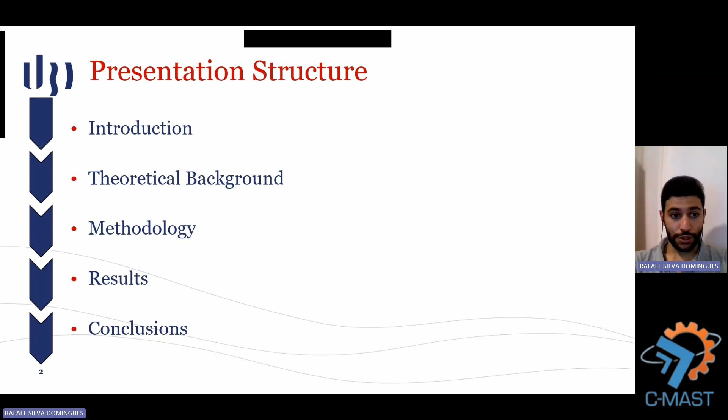In the last decades, the aviation sector has grown and reinforced its importance at an international level. According to a report found in the literature, in 2015 international aviation used approximately 160 megatons of fuel. According to some experts, when compared with 2015, by 2045 international air traffic is expected to increase by 3.3 times, and fuel consumption is projected to increase by 2.2 to 3.1 times, depending on advances in technology and the air traffic management scenario.

This creates a problem because the increased fuel consumption will inevitably lead to an increase in pollutant emissions into the atmosphere. The combustion of fossil fuels produces emissions which are usually considered the main responsible for greenhouse gas emissions. For the aeronautical sector, the emissions of major concern for climate change are usually NOx, CO, CO2, and particulate matter.

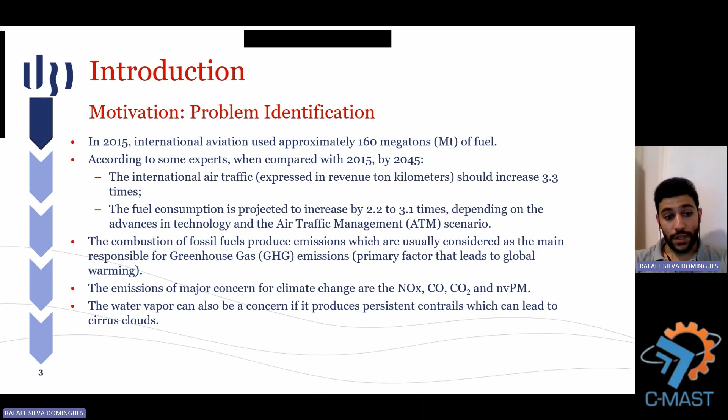Sometimes water vapor can also be a concern if it produces persistent contrails, which can lead to cirrus clouds. However, during this research, water vapor will not be considered as a major pollutant.

For possible solutions, if we don't consider economic and political measures and focus only on the technical part to mitigate the emissions problem in the aviation sector, the several possible solutions can usually be grouped into 2 main options. The first is reduction of fuel consumption by upgrading technology used in current aircrafts, with the objective of achieving higher efficiencies. The second is the use of alternative fuels and power sources.

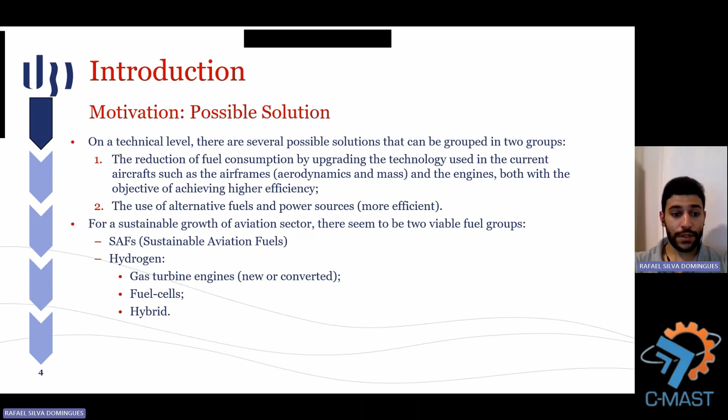According to some reports, this last option seems to be the most effective. Therefore, considering the fuels currently known, for a sustainable growth of the aviation sector, there seem to be 2 viable fuel groups: sustainable aviation fuels, and hydrogen, which can be used in combustion on gas turbine engines, either new engines or converted engines, and can also be used in fuel cells. A third solution is the use of a mix of the previous 2 options, which consists in hybrid systems.

So the object of this work consists in the conversion of current gas turbine engines to new sustainable fuels, mainly hydrogen, which is the main objective of this research.

The main objective of this work consists in the study of the feasibility of the use of gaseous hydrogen as a substitute of conventional jet fuel in a CFM56-3 combustor using a CFD approach. For that, it was necessary to analyze and compare the results obtained for hydrogen and jet fuel during the CFD analysis. This was made through the comparison of NOx emissions produced by jet fuel and hydrogen for the power settings represented by the ICAO's LTO cycle for the standard operating conditions of the engine.

The last objective was to analyze and compare the influence of several operating parameters on the emissions of NOx with the use of hydrogen as a fuel.

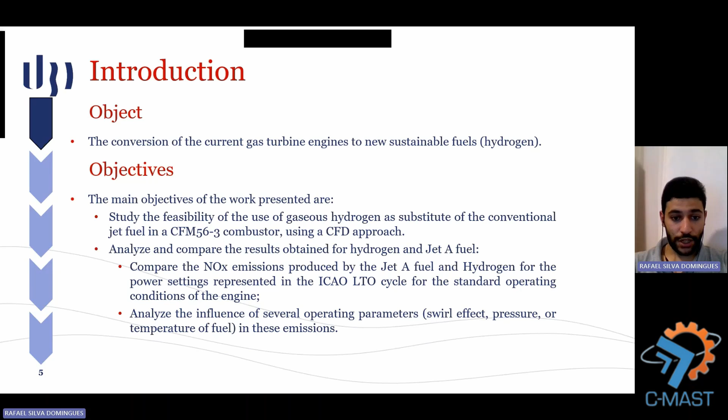Hydrogen is the simplest and most abundant of the chemical elements in the universe. On Earth, under standard conditions, it exists as a diatomic gas, but its concentration is negligible. However, in chemically combined forms, it is the 3rd most abundant element on the planet.

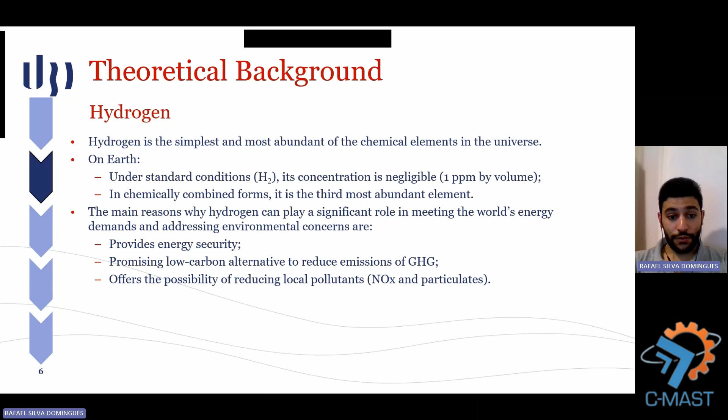The main reasons why hydrogen can play a significant role in meeting the world's energy demands and addressing environmental concerns are that hydrogen meets 3 extremely important criteria. First, it provides energy security. Then, it's a promising low-carbon alternative to reduce the emissions of greenhouse gases. And third, it offers the possibility of reducing local pollutants, mainly NOx and particulate matter.

For the conversion of the current gas turbine engines to hydrogen, in theory, to adapt the current gas turbine engines to efficiently use the hydrogen as a fuel, the minimum modifications required consist first in the replacement of the injection system, and second, the implementation of facilities to evaporate the hydrogen, which is usually stored in tanks in a liquid or cryogenic state.

However, if we want to take full advantage of hydrogen's properties, the combustion chamber must also be changed. In both cases, when changing to hydrogen, either the combustor outlet temperature (COT) or the net thrust of the engine can be retained. Usually, when the COT is preserved, the net thrust increases, and when the net thrust is retained, the COT decreases.

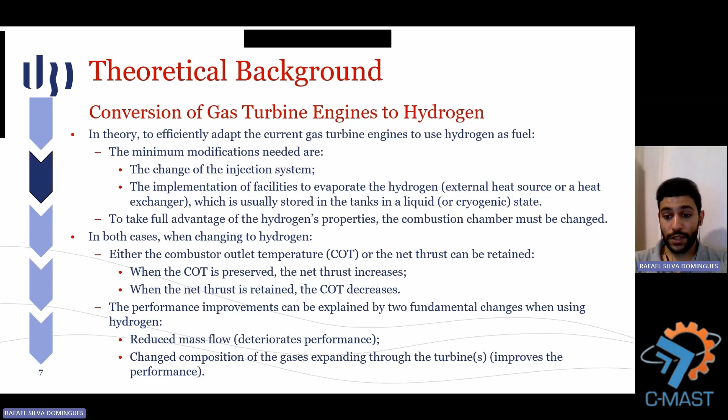According to some works in the literature, these performance improvements can be explained by two fundamental changes when using hydrogen. First, there is a reduced mass flow through the engine, which in theory deteriorates performance. Second, there is a changed composition in the gases expanding through the turbine, which usually improves performance. When combining these two effects, the effect of the latter on engine performance is always more relevant than the former, hence the improvement in performance.

Regarding the mechanisms of pollutant formation for conventional fuels, as we know, the pollutant emissions of most concern are usually CO, CO2, unburned hydrocarbons, NOx, and particulate matter. From an environmental point of view, hydrogen can be considered almost as a clean fuel that offers the possibility of reducing pollutant emissions, since its combustion only produces NOx emissions.

Considering this research and its objective, as NOx is the only common pollutant produced by these fuels, and considering the objectives of the work, only the NOx emissions were studied.

According to ICAO, these emissions can be evaluated in two possible scenarios: first, the NOx emissions in the full flight, or second, the emissions produced when completing the ICAO's LTO cycle. In this case, since we only have the experimental results for the ICAO's LTO cycle, this was the approach selected.

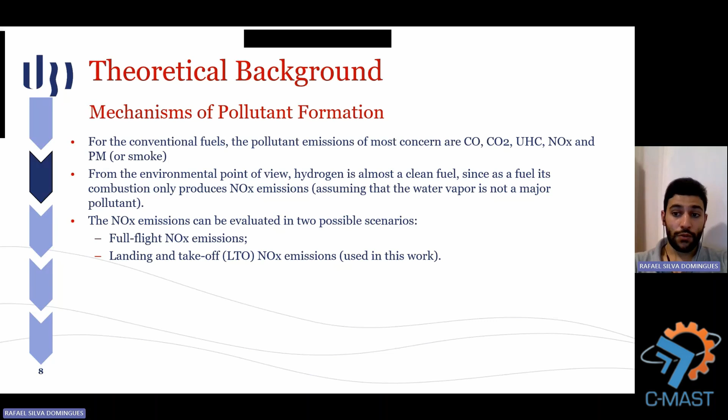The combustor model used for this study was from a CFM56-3, an engine developed and manufactured by CFM International. The version under study consisted of a high bypass axial flow turbofan with a bypass ratio of 5.1 to 1.

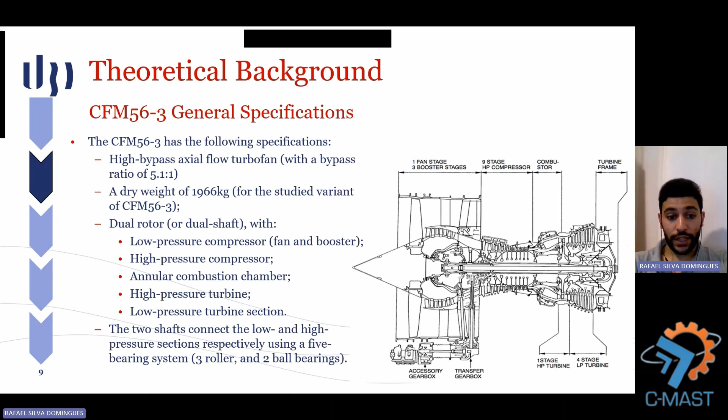This specific version has a dry weight of 1,966 kilograms. As we can see in this image, this engine has a dual rotor configuration with a low pressure compressor, high pressure compressor, annular combustion chamber, high pressure turbine, low pressure turbine, and the two shafts connecting the low and high pressure sections respectively using a 5-bearing system.

From here onwards, I will describe the methodology followed to achieve the objectives initially presented. However, to simplify the explanation of the process followed, this work was divided into 3 consecutive and iterative phases.

Phase number 1 consisted in the correction and preparation of the geometry for the next phases, and by the end of phase number 1, it was necessary to generate an independent mesh to use in the simulations. Phase number 2 covers the entire process of defining the simulation parameters in order to obtain the correct patterns for the flow and combustion within the chamber.

Phase number 2 also covers obtaining the final results for both fuels. This phase is deeply related to phase number 1, since part of the geometry corrections were due to problems detected in phase number 2 during the simulations.

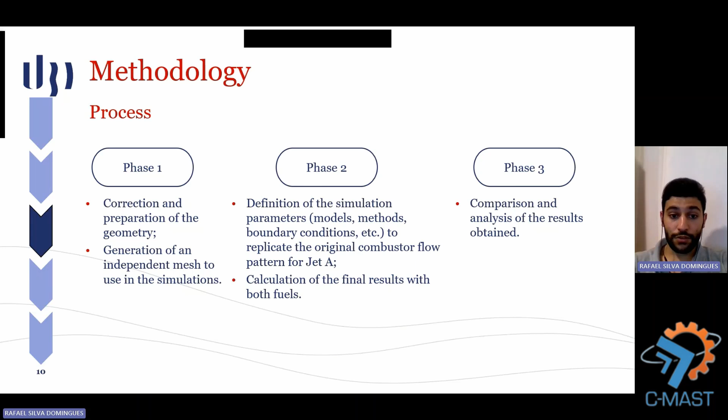Finally, phase number 3 consisted in the comparison and analysis of the results obtained during phase number 2. Due to the complexity of phase number 2, it was necessary to subdivide it into another 3 subphases.

The objective of phases 2.1 and 2.2 is to credibly replicate the original operating conditions of the engine working with Jet A through an iterative process. Phase 2.3 is associated with the hydrogen simulations, to evaluate the theoretical performance of the engine with this fuel.

In this case study, phase 2.1 was carried out only for the 100% power configuration, and it consisted of an iterative process in which the objective was to determine the air mass flow distribution in percentage, first to replicate the flow pattern inside the combustion chamber, and then to obtain an outlet average static temperature similar to the reference values we have from other works.

Phase 2.2 consisted in the verification of whether the air mass flow distribution calculated in phase 2.1 was the most appropriate for each power setting, through the analysis of the flow pattern inside the chamber and the NOx emissions, which we could compare with the reference values from ICAO.

The final objectives were to obtain first the final results for the control simulations with Jet A, mainly the NOx emissions, and then to find also the boundary conditions for the air inlets for each power setting.

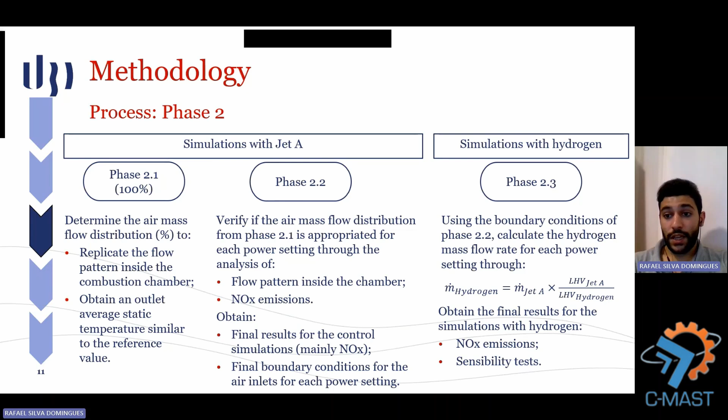After that, it was necessary to run the simulations, and the final objective was to obtain the results for the simulations with hydrogen, mainly the NOx emissions and the results for the sensibility tests performed.

About the NOx analysis, after analyzing some articles available in the literature about studies identical to this one, it was concluded that there were two ways of analyzing the NOx emissions: first, the utilization of sub-mechanisms provided in the detailed mechanisms, and then the use of the NOx model provided in Ansys Fluent.

In these studies, it was also mentioned that to simulate the combustion process inside the chamber, the use of the detailed mechanisms allowed better results than when using the probability density models available in Ansys Fluent.

After analyzing and testing a considerable number of mechanisms available in the literature, the mechanisms chosen for this research were, first, the mechanism presented by Kundu et al. to simulate the combustion of Jet A in phases 2.1 and 2.2, and then the mechanism of Li et al. to simulate the combustion of hydrogen in phase 2.3.

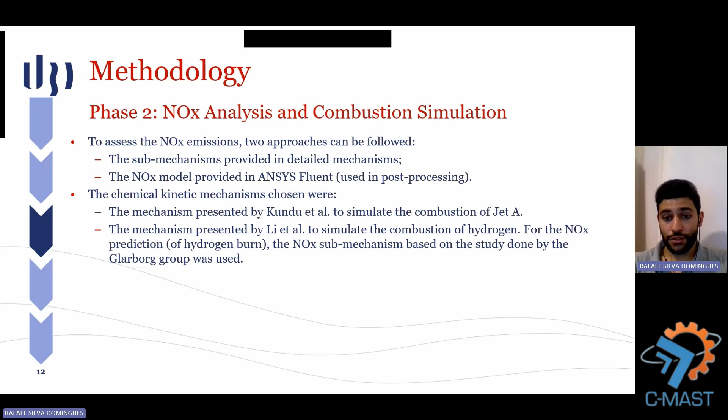Regarding the simulation setup, in general, the simulations carried out were 3D simulations in steady state, and the pressure-based solver was used in all of them.

After some tests with the available models in Fluent, it was found that the best results were obtained for the set of models defined as shown here on the left, as we can see.

However, due to the complexity of this work and the number of models applied, to obtain completely converged solutions, it was necessary to use a step-by-step approach in which simpler models were used to obtain the initial converged solutions, or close to it, as you can see here for the Jet A, and then for the hydrogen simulations.

We started here: step 1, step 2, 3, and 4, and finally the post-processing. Here we use the simpler models at the beginning, as we can see.

After getting the initial converged solutions, or close to it, the more complex models were gradually applied, as we can see here in these cases, step 2, 3 and 4, until we got the final results that we presented in the research.

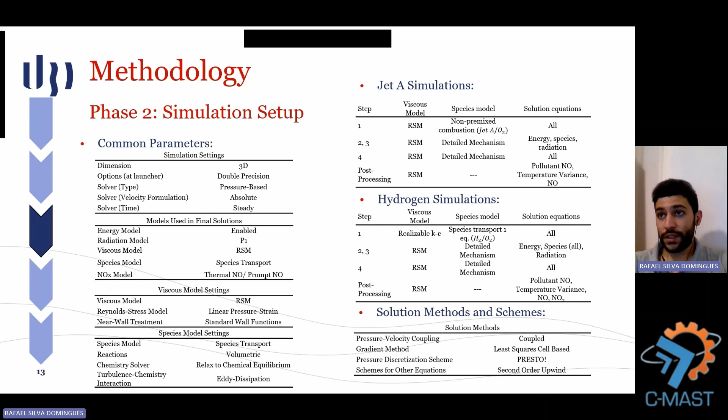Regarding the results, in this presentation only the results related to the NOx emissions from a quarter of the chamber will be presented, as they were the main objective of this work.

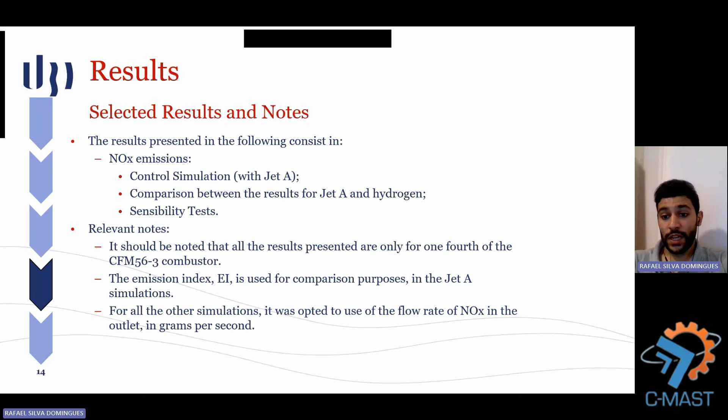Starting this analysis with the emissions obtained during the control simulations with Jet A, this figure presents the results of the control simulations and shows the emission index at the exit of a quarter of the combustion chamber for the Jet A.

Here we have ICAO's reference data and the two approaches followed during the simulations: the utilization of the NOx mechanism and the utilization of the NOx Ansys model.

Considering the two approaches used to predict the NOx emissions presented in this figure, it's possible to conclude that for both approaches, the NOx emissions are lower at lower power settings and attain maximum values at the highest power condition.

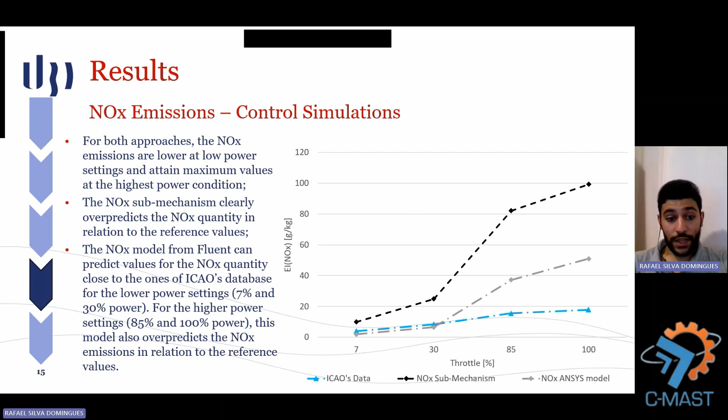The NOx sub-mechanism clearly overpredicts the NOx quantity in relation to the reference values. However, the NOx model from Fluent can predict values for the NOx quantity close to the ones from the ICAO's database for the lower power settings. For the higher power settings, this model also overpredicts the NOx emissions in relation to the reference values.

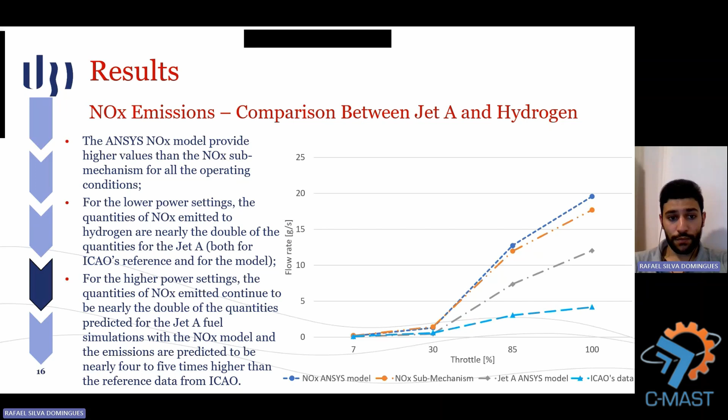In this work, several sensibility tests were carried out, namely the presence of the swirl effect at the swirler's inlets and the influence of injection parameters, namely the fuel injection pressure and the temperature of the fuel. Regarding tests associated with injection pressure, modifying these values did not cause any relevant changes in the results, and for this reason these results will not be presented, as they do not allow analysis of the influence of this parameter.

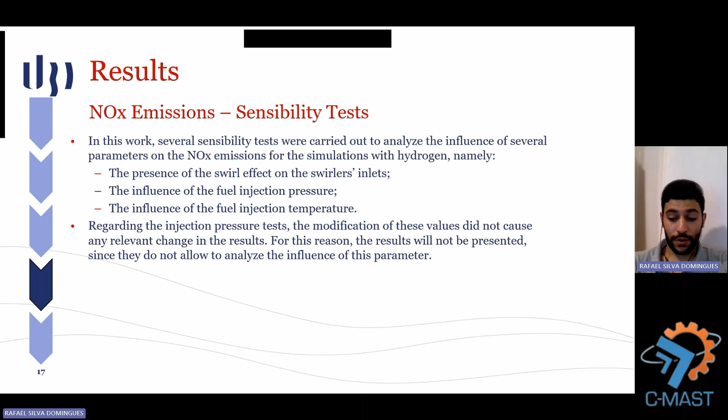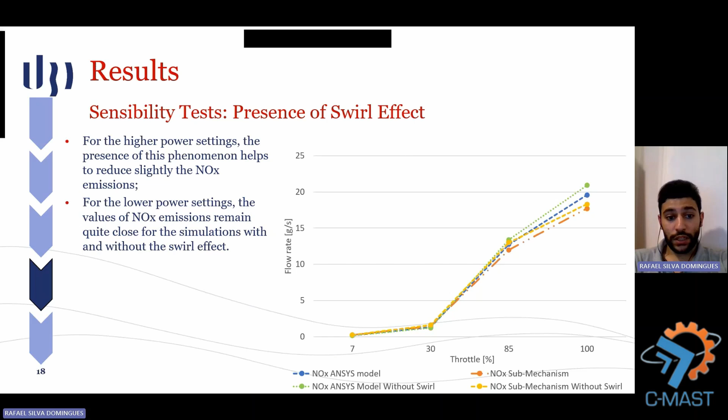Looking at this image, if we consider the same forecasting approach—either just the Ansys NOx model values or the sub-mechanism values—it is possible to conclude that for the higher power settings, the presence of this phenomenon helps to reduce slightly the NOx emissions. However, for the lower power settings, the values of NOx emissions remain quite close for the simulations with and without the swirl effect.

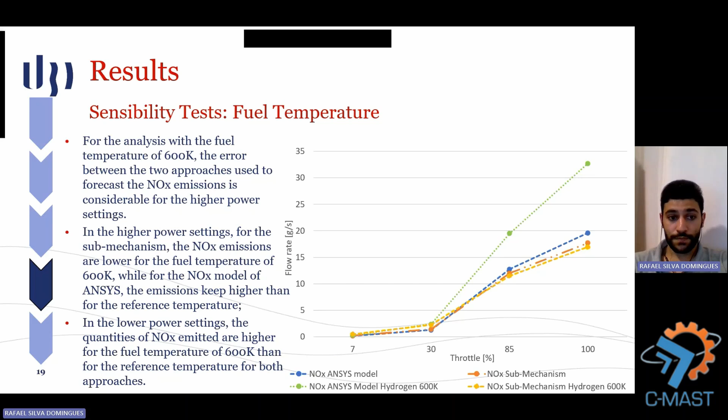The conclusions of this research consisted, first, in that all of the objectives were accomplished, and it was demonstrated that theoretically, the CFM56-3 can work with hydrogen as a fuel with minor changes. Then, the results obtained for the control simulations were acceptable when compared with those of ICAO.

The results obtained for the simulations with hydrogen demonstrated that with the increase of the accelerator percentage, a higher mass of NOx per mass of hydrogen is produced, due to the increase in the temperature inside the chamber, as would be expected.

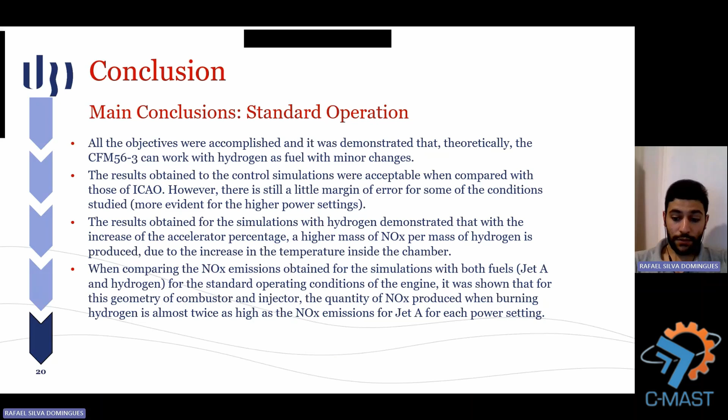Finally, when comparing the NOx emissions obtained for the simulations with both fuels for the standard operating conditions of the engine, it was shown that for this geometry of combustor and injector, the quantities of NOx produced when burning hydrogen is almost twice as high as the NOx emissions for Jet A for each power setting. This conclusion is in agreement with several other works available in the literature, which is a very good sign.

Regarding the sensibility tests, it was concluded that the presence of the swirl effect helps to reduce the NOx emissions, and an exponential rise in the fuel temperature can cause malfunctions across the chamber. Finally, the fact that changes in the fuel injection pressure have not influenced the results can be explained by the fact that changes in the fuel density due to the injection pressure modification were irrelevant.